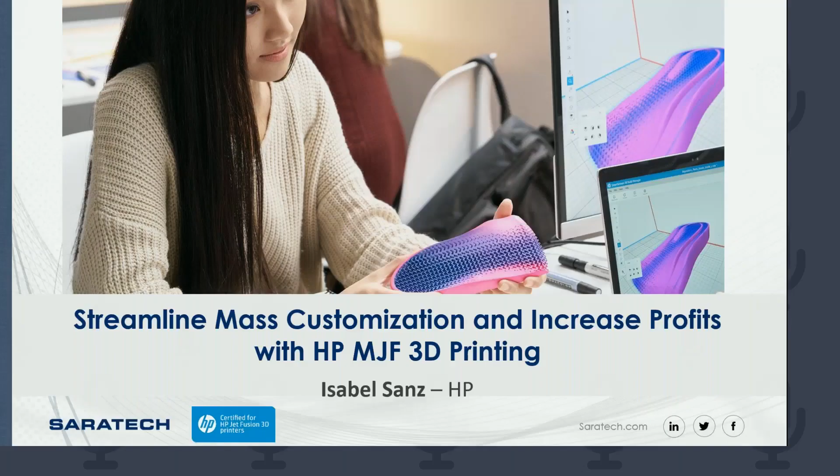So today we have a special guest, Isabel Sanz from HP. She's an inventor. She holds, I think, 10 patents. She's an author, a speaker, and an evangelist for anything that's 3D printing. So she's a very, very busy person, as you can imagine. So thank you very much for being with us today, Isabel.

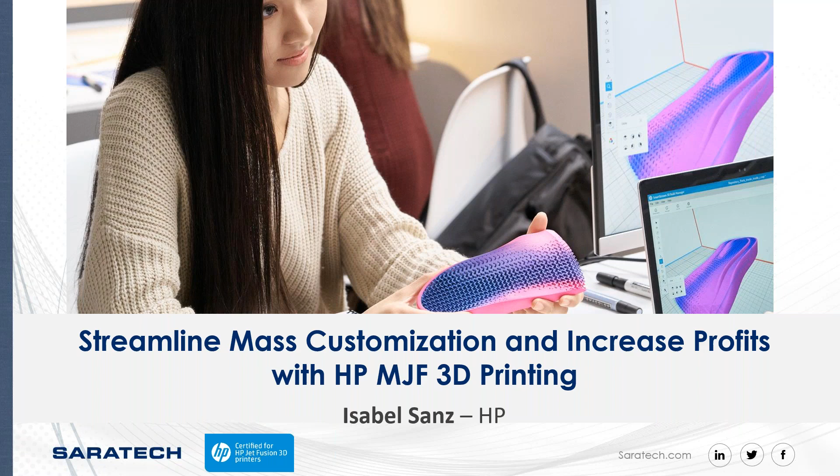Sure. So today our agenda is fairly simple. I'll talk a little bit about Saratech and share with you what we do as a company. But the main portion of the presentation, Isabel will be sharing with us how to customize products efficiently at a lower cost and with minimal waste using HP 3D printing technology.

So if you think about it, mass customization is applicable for many industries. Matter of fact, customers now demand customization a lot of the time for the products that we produce, right? So, whether it's automotive, consumer products, or medical, people want things to be customized. So as you watch some of the examples that will be shown today, think of how they apply to what you do, to your company, and to your industry.

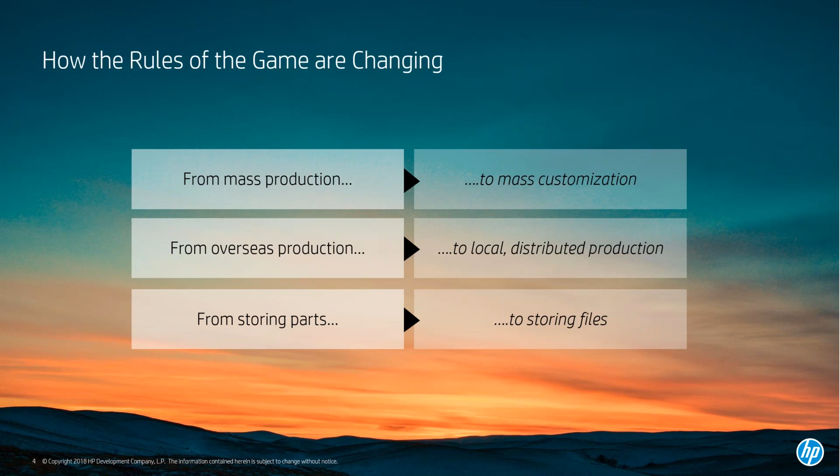Then, on the other hand, from the trend of placing the production overseas, we move to distributed production, which is able to be more flexible to meet shorter lead times and therefore adapt faster to variations in the demand. And even if we take a look into the supply chain, there's a movement from storing parts to producing parts on demand instead. And this will lead to storing files instead of storing parts, which will contribute to the reduction of inventories and warehouses.

And if we run the comparison with other traditional manufacturing methods, we can see some evolution as well in the mindset to design for each of those. When we design for CNC machining, we try to reduce the machining operations. And now, instead of looking into that with additive manufacturing, we'll think about how to minimize the material used. This is the biggest and the main change that happens when we move from a subtractive technology to an additive one.

A cost-effective part in a subtractive technology, such as CNC machining, for example, will be a very solid part, as the cutting operations of the part are reduced in order to minimize the cost of the part. Because if the part is taking longer to be produced, that means a higher cost. But in additive manufacturing, the approach is totally different. A part will be designed in this case to have the minimum material needed in order to be more cost effective. And this also has advantages in terms of CO2 reduction, as it's more sustainable because we have less waste material.

Then in the same direction, if we compare it with injection molding, instead of thinking about the demolding directions in the mold and the draft angles, now in additive manufacturing, we need to consider the printing orientation and design based on that in order to optimize the final part. And finally, if we compare it with sheet metal, we'll move from thinking about which is the folding strategy to make that part work to combine parts together and unify assemblies in order to get the best from the additive manufacturing.

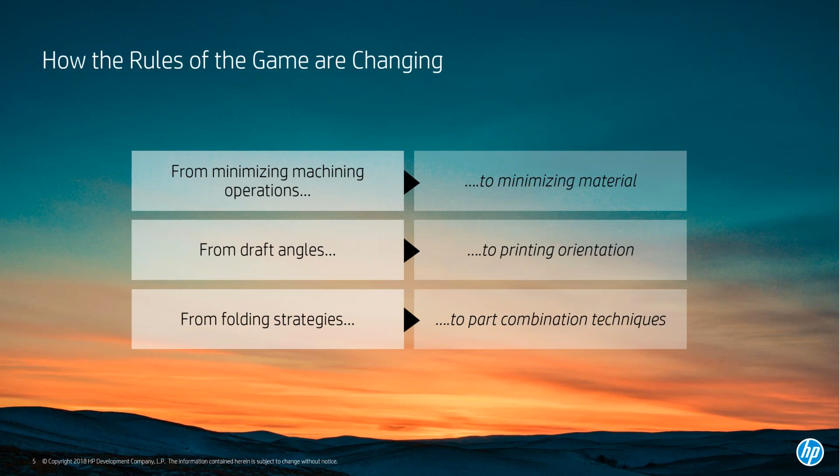And if we look into the opportunity, there are two main ways to justify 3D printing for end user parts, so for final part production. On one side, one of the reasons to move to 3D is to produce parts that are totally personalized or customized, because that's improving the performance, the ergonomics, and is adding additional value to the customer. One clear area where this personalization is improving the satisfaction is the medical industry, because this full personalization of the products is enabling the patients to get products that are designed for them, which are more comfortable and are easier to use.

But this is not the only reason why it makes sense to produce parts or products with multi-jet fusion. There are other cases where the production runs are short or medium size, so the volumes are short or medium, where it makes economic sense to produce the parts with additive manufacturing instead of investing in molds or instead of producing those parts with CNC. The volumes where multi-jet fusion is competitive in terms of economics could go up to the tens of thousands. So it could be 20,000, 30,000 parts per year, and it will depend on the part geometry.

And moreover, in this scenario, there are additional advantages of producing the parts with multi-jet fusion instead of using, for example, injection molding. Apart from the cost, we will generate less waste and we will be more scalable because there is no need to produce the molds in advance before you have total control or you understand completely the demand. So you could scale your production as you are learning from the market how that product is performing. And for example, if we compare it with CNC, we are minimizing the waste because we are using an additive technology instead of a subtractive one.

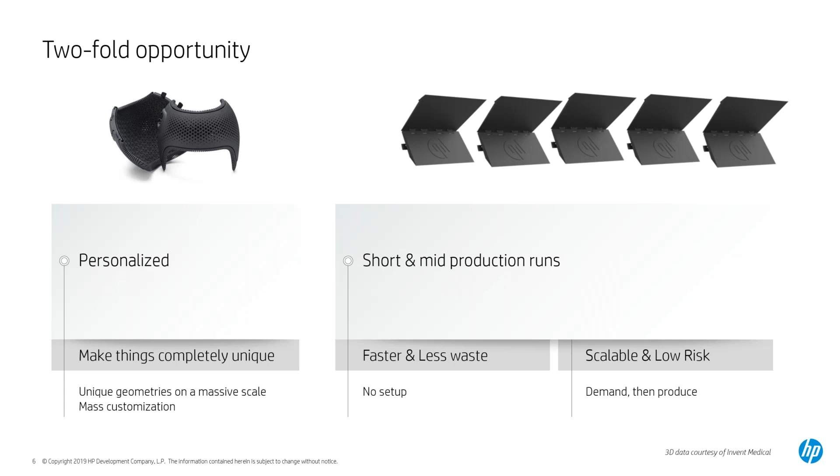Additive manufacturing is a new manufacturing technology and complements the current existing technologies, but it's not the solution for everything. As happens with the other technologies, it can be a very good fit for some types of parts. Therefore, the best applications to start with Multi Jet Fusion are the ones you are seeing in the slide. As I said before, any part with low or medium volume production could be a good candidate.

But if we dive into these candidates, for example, parts where weight is a limitation are a very good fit for the technology, because in this case the mass could be reduced, especially if we are moving parts from CNC machined metal to plastic. In some industries, such as automotive or aerospace, this additional weight is going to reduce the autonomy of an electric vehicle or a drone. So the improvements you can make in weight reduction can bring additional advantages, such as additional autonomy.

On the other hand, in fluid management systems, there are a lot of opportunities to combine parts and optimize the performance of the system itself. Today, the geometries used in these systems are in some cases defined by the limitations of the manufacturing processes used. It's very difficult, for example, to get a tube with a variable diameter. However, this is something we could easily produce with Multi Jet Fusion because there's much higher freedom of design. Apart from that, thanks to HP's technology, we are able to produce parts that are fluid tight, including fluids such as water, air, etc., without the need for any additional post-process.

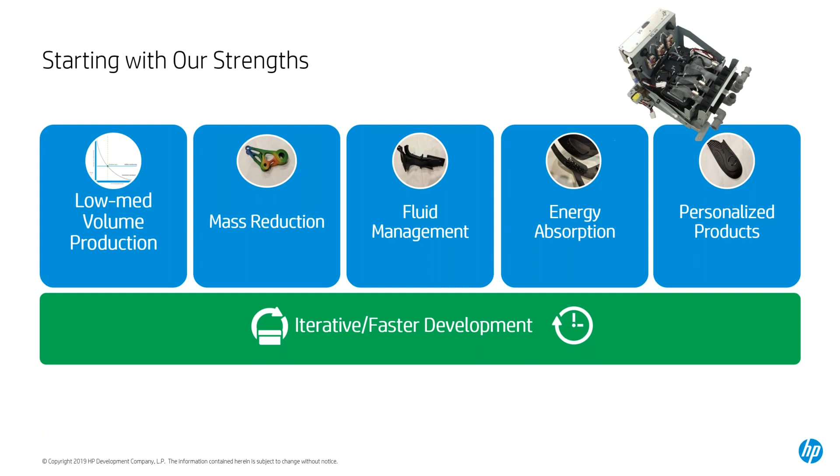Apart from this, in terms of development time and new product introduction in the market, lead times can be reduced with additive manufacturing, which allows more iterations or faster development cycles. Thanks to this, you will be able to introduce products faster in the market, so you can learn faster about the performance and the feedback you are getting from your customers. Having said this, now I'd like to give you an overview of how Multi Jet Fusion is enabling these applications today.

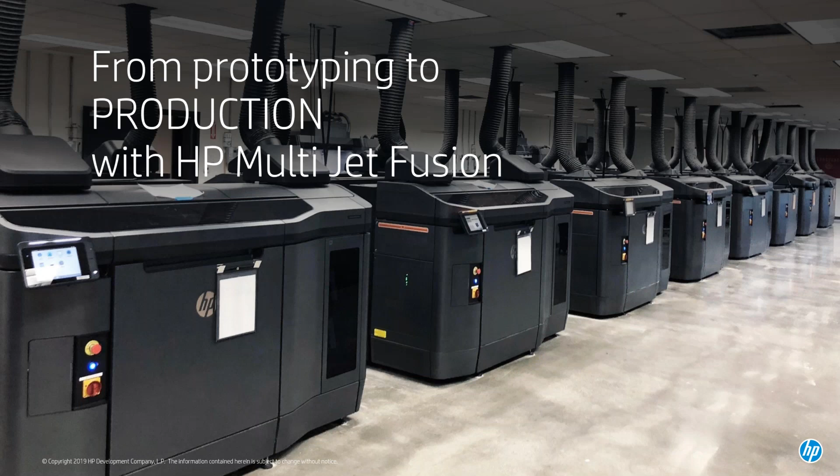Today, we see that there's a momentum in 3D printing, and we are in a strong position. We introduced our first printer almost 3 years ago, and since that moment, we have become the #1 commercial thermoplastic solution. Apart from that, outside researchers have classified Multi Jet Fusion as the most used industrial 3D printer in the market in 2019, nearly 3 times more used than the nearest competitor.

During the sales process at HP, we produce what we call a benchmark, which is an example of the type of application a potential customer is planning to produce. What we see is that more than 50% of those benchmarks today are done for applications that will go into production. So more than 50% of our customers are looking into final part production.

What this is telling us is that new applications have been enabled across all the different industries, including automotive, industrial equipment, healthcare, and consumer goods. As an additional effort, we are also increasing our portfolio. During this year, we have introduced a color printer and we have developed and launched a new metal technology.

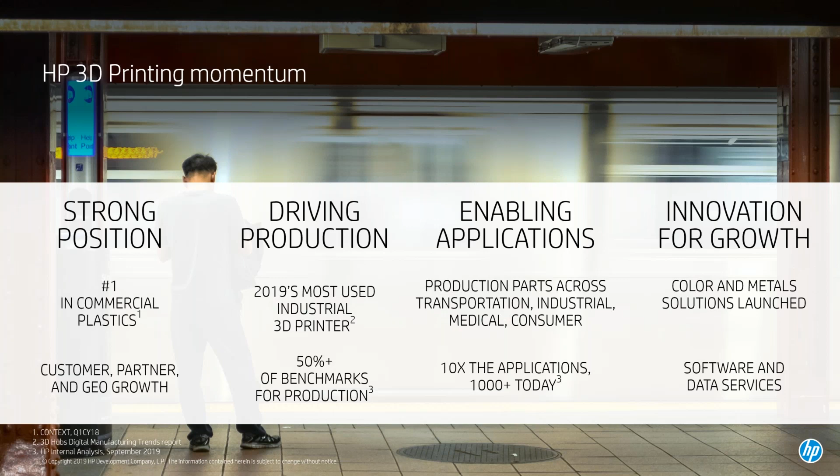But the reason behind all those numbers, and how we made that possible, is the introduction and development of Multi Jet Fusion technology, which is HP's technology. This is powder based, so we are printing using thermoplastic powder particles as the raw material, and the full process can be divided into 4 different steps. In the first one, the HP inkjet printheads apply liquid agents across the print bed, a fusing agent and a detailing agent.

So we have these 2 agents. The fusing agent is the one that defines the area of powder to be fused. The detailing agent, however, is printed on the borders of the part to avoid thermal conductivity to the surrounding powder, which helps to get good part accuracy and sharper edges.

Then after this step, the powder bed is heated by infrared light. In this moment, water and other volatile components from the liquid agents evaporate, and the particles in the areas where the fusing agent has been placed melt and fuse. This happens because the fusing agent provokes more absorption of energy, because it has a higher absorption in a wider range of wavelengths in the infrared region. Thanks to that, the temperature in those areas is higher than in the rest of the print zone.

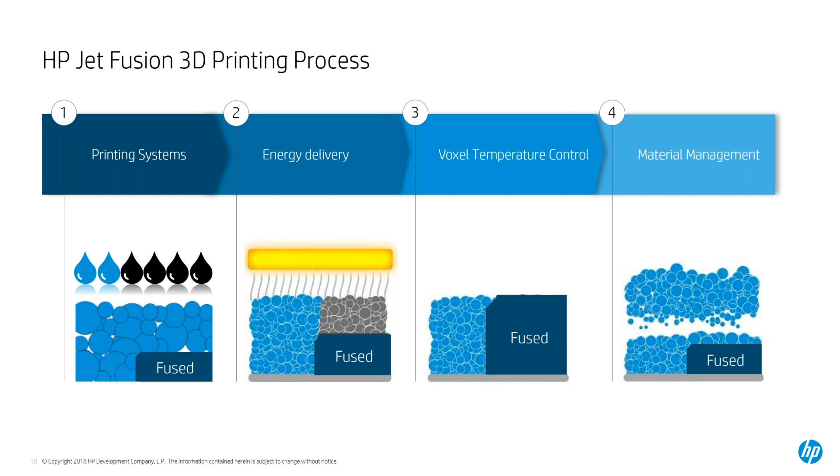This enables fusing the material in those areas where the fusing agent is located, while in the rest of the print zone there's unfused material. Then we repeat this process in each layer. After we have fused the part, we apply the next layer of powder and we continue placing the agents and applying the infrared light afterwards.

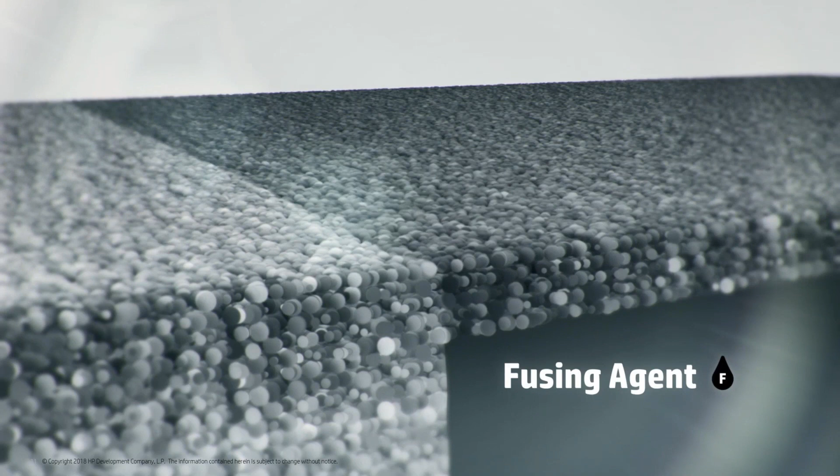Why are we using these two agents? This is done because it increases the thermal selectivity during the printing process. The fusing agent is used to increase the energy absorption of the desired voxels to be made. For example, if we are printing a cube, we will print fusing agent in a solid square in each layer. On the other hand, the detailing agent is used in the borders of the part to prevent heat conductivity from the fused parts to the fresh powder in order to ensure accuracy.

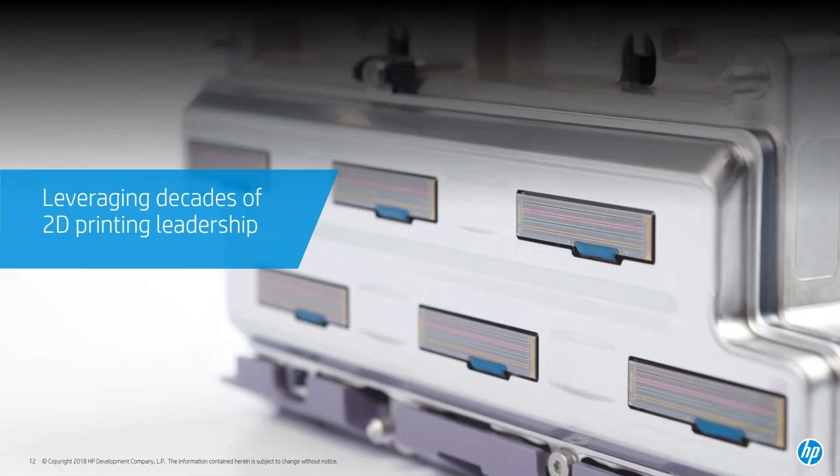As you can see in this video, for every part there will be fusing agent creating the final part and the final geometry, and a thin exterior shell of detailing agent applied in the borders of the part. After explaining the technology, there are also some assets used in this printing process that are key to get this final outcome and performance. One of those critical components is the printhead. HP uses in the 3D printers the inkjet technology that comes from the 2D printers, and that has been developed for years.

Now I'd like to take a minute to talk about some of the characteristics of our printhead. As I said, we have spent dozens of years developing the algorithms for placing the inks where they need to be on a page, and we have transferred this knowledge to the 3D printers. If we take one of our printers, which is the color printer, we can see that inside the printheads we have more than 80,000 nozzles.

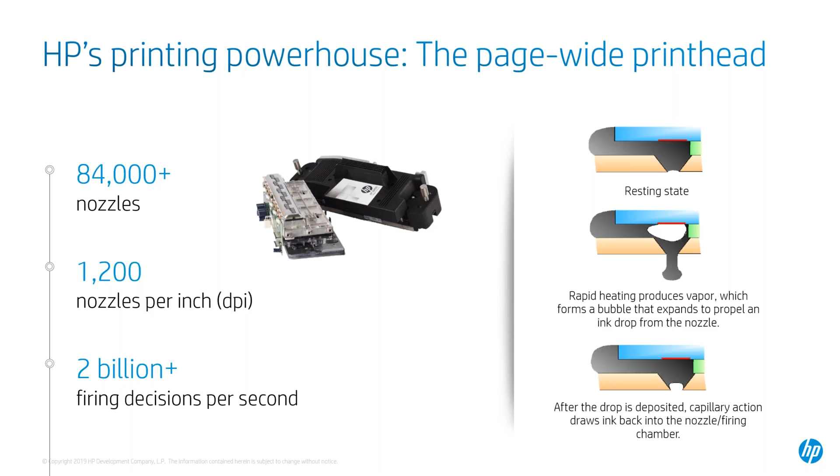The resolution per each printhead is 1200 nozzles per inch. If we combine the quantity of nozzles, the width of the printheads, and the firing speed, we are making more than 2 billion firing decisions per second while a part is being printed. This is thanks to the thermal inkjet technology HP has developed, previously for the 2D printers and now for the 3D space. This is one of the reasons why we are able to achieve this high resolution and high level of detail, because we have a high resolution in the printheads themselves.

Now let's see some examples of customer use cases where Multi Jet Fusion is used today for final part production. As I said before, today we have customers using Multi Jet Fusion in the main industries, which include transportation, industrial equipment, medical, and consumer goods. If we start looking into transportation, lightweight is one of the critical factors, especially in electric vehicles and motorbikes, because it's one of the factors that will determine the autonomy of the batteries.

Then on the other hand, in the industrial equipment, we are able to produce several parts. Two main important areas are the robotic arms and the robotic grips. Here we are able to fully customize each of the grips or the arms based on the final application. Apart from that, we are also able to reduce the weight of the final end effectors.

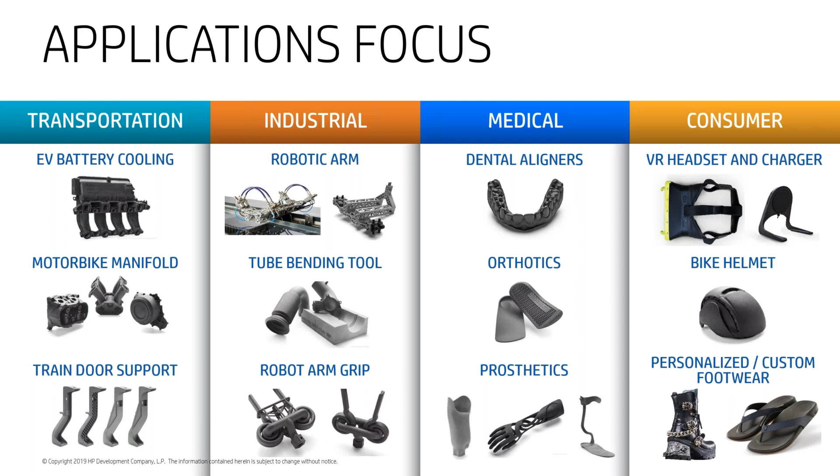And in footwear, there are a lot of options as well in terms of personalization, like the case of these high heels that you see, or improving and customizing the performance of the flip-flops based on the customer that buys them.

And now I'd like to show you an example of a company called Bowman that is using Multi Jet Fusion today to produce their bearings. This is a company based in the UK that has been able to develop new designs of their current existing products and innovate thanks to the use of Multi Jet Fusion technology. Because in this case, due to their volume, it makes economic sense and it's more cost effective.

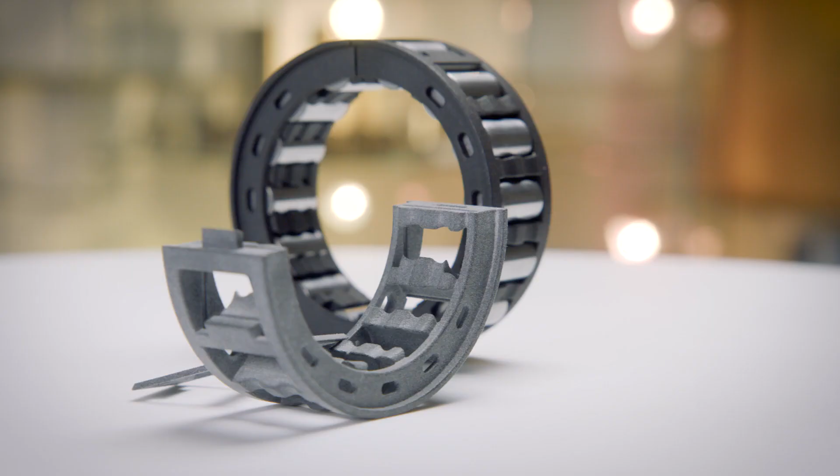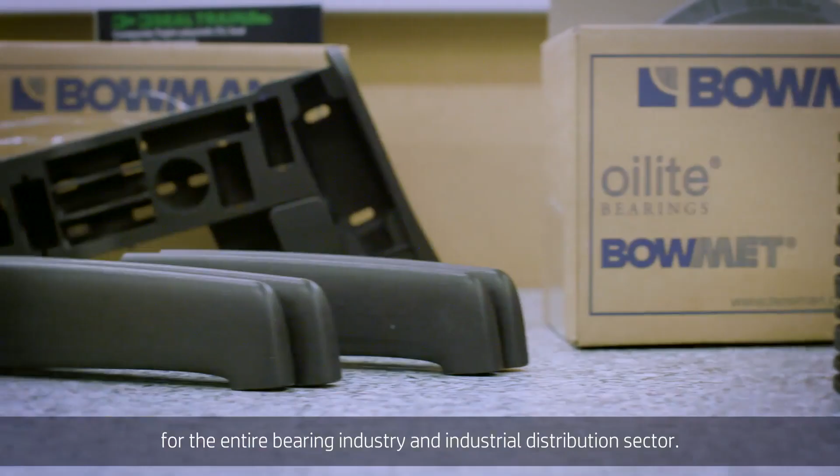What we've been able to do is address designs that haven't really changed for over a century and bring 3D printing in and actually massively improve those designs. Bowman is a bearing company. We distribute and manufacture bearings for the entire bearing industry and industrial distribution sector. We started using 3D printing about 3 years ago when we started developing these products and realizing what could be done with 3D printing.

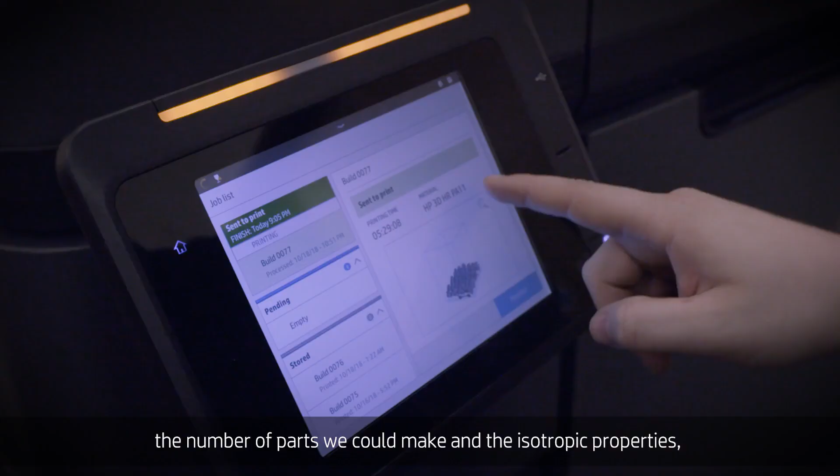For us, the Multi Jet Fusion process was a massive step forward in terms of output, the number of parts we could make, and the isotropic properties, so having the same mechanical properties throughout the part. With designing for MJF, we're able to design for the optimal product rather than being limited in the geometries we can create. So we're actually able to make the perfect bearing cage in our instance.

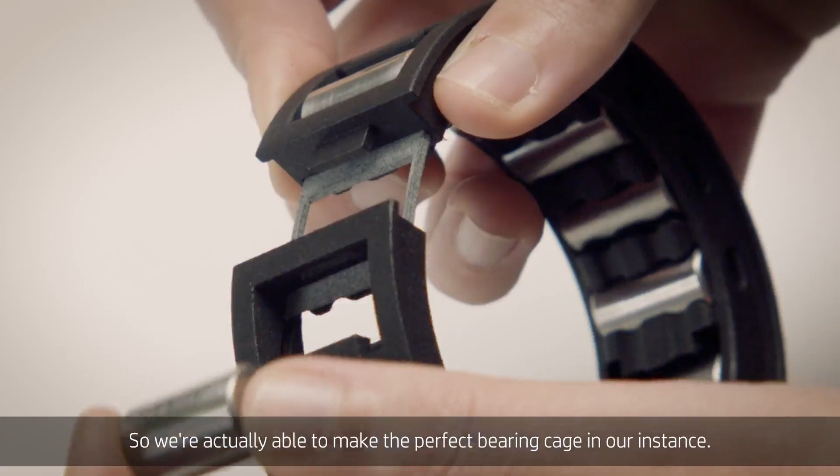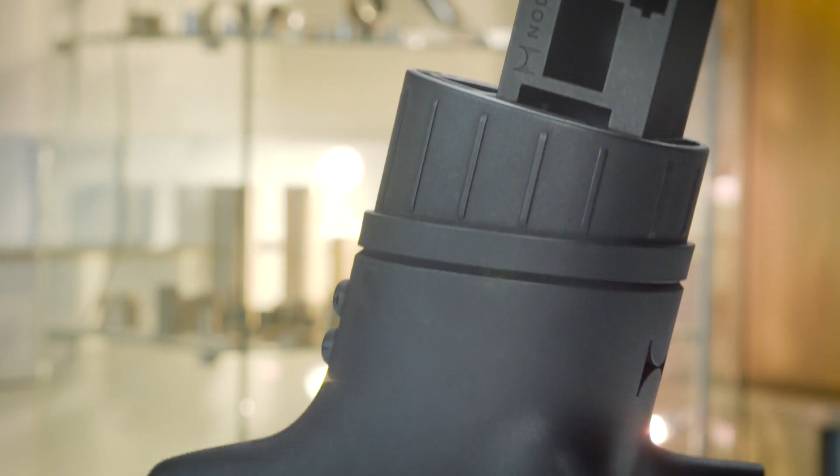For us, PA11 was the obvious choice because it has slightly better mechanical properties, impact resistance, which is important for us, and the elongation at break, and generally just a slightly higher grade engineering material. By using the MJF cage, we're able to take the entire bearing's load capacity 30 or 40 or even 50% higher, 3 to 5 times the life of a traditional bearing. There's not a product on the market that comes close to the performance we can get from our product.

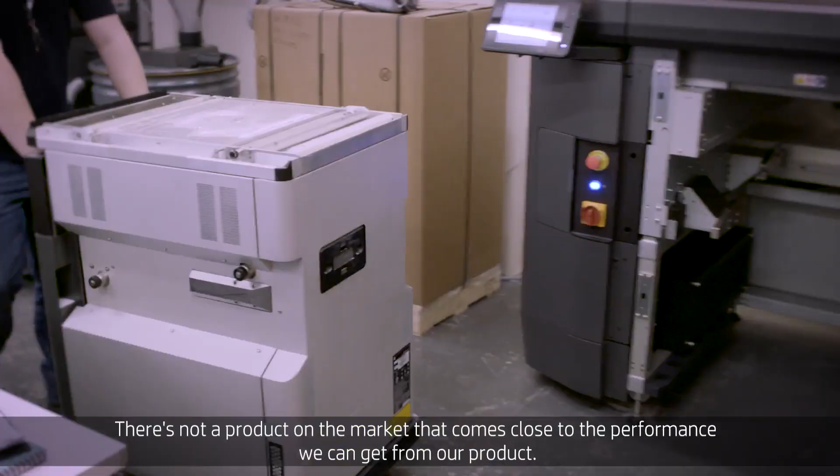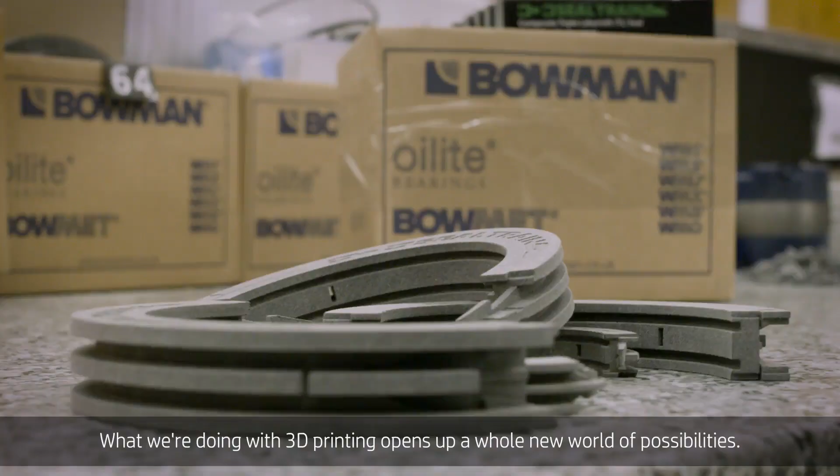For us, having the technical support and backup from the HP service engineers is essential to make sure that we can keep our production system running 24/7. For Bowman, we see an enormous future with using MJF technology. What we're doing with 3D printing opens up a whole new world of possibilities. The bearing industry, just on its own, is an enormous industry with tens of thousands, millions of products every year which could benefit from implementing exactly what we've done already with split roller bearings.

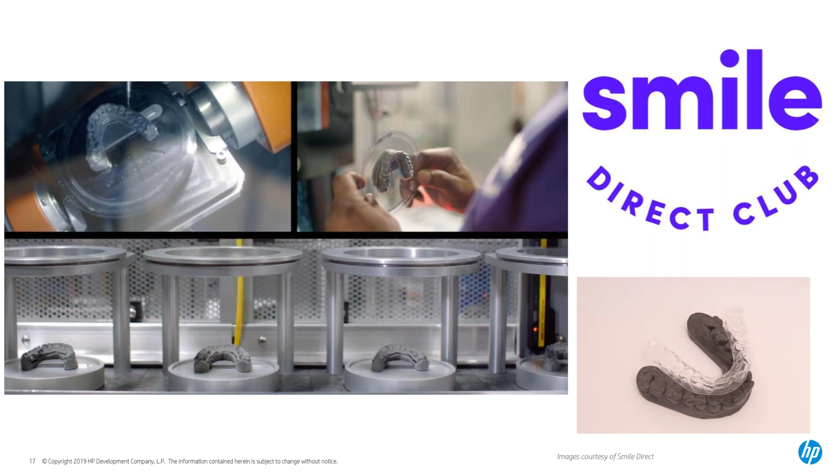Good. So after seeing this video, I wanted to show you as well some examples in the medical industry. Here, there's a new company that is called Smile Direct Club, and this company produces clear aligners for correcting the position of the teeth, and it's similar to, for example, Invisalign, which is one of the most known ones.

This company started as a do-it-yourself aligner treatment for the front 6 top and bottom teeth. And the reason why it's do-it-yourself is because they have reduced some intermediate steps in the workflow or in the process. So now you can go online, fill a questionnaire, and if you are determined to be a suitable case, you can order an impression kit.

So this kit is sent to your home. Then you need to make the impression of your teeth, send it back to them, and then they scan that. And there's a doctor that is going to review those teeth and then propose the different steps that you will follow with the aligners in order to correct your teeth to go into their final position.

So then after that, you can order the set of aligners that you will have at your home in a couple of weeks. And all this process is costing the patients around $1,800, which is a big difference compared to any other aligner treatment that is available in the market today, which have costs higher than $5,000. So they are driving the cost down both in the production of the aligners and at the same time making it easier for patients to access and removing some intermediate steps.

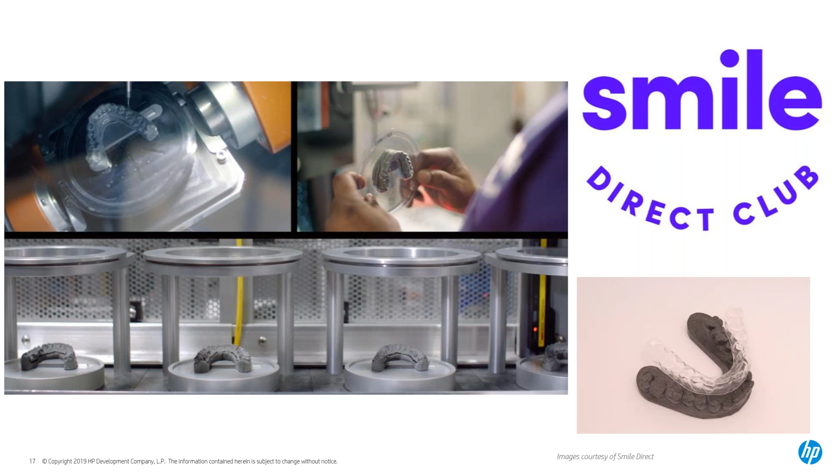And then if we deep dive in the other areas in the medical space, we see that there's a lot of opportunity in prosthetics and orthotics. Here, for example, in terms of productivity, we are able to produce parts faster compared to other traditional methods and compared to other 3D printing technologies. But at the same time, as in most of the cases, the way to produce the final parts today is a very manual process. We are able to reduce a lot of this manual labor time.

Then if we take a look into the quality of the parts, the reason why we are able today to produce insoles in orthotics and in the sports industry is because with HP's technology and with our materials, we are able to produce isotropic properties, which means that the parts are going to have the same behavior no matter the printing orientation. So this is enabling high performance products able to withstand fatigue and a number of cycles, for example, in insoles or any other prosthetics and orthotics product. And apart from this, we have passed the biocompatible certifications to have contact with the skin.

And then if we look into the third pillar, we are also more sustainable than other traditional technologies or processes. So for example, we are able to reduce the waste up to 20 times in insoles production if we compare it with CNC machining. And apart from this, we have highly reusable materials and our PA11 is coming from a renewable source. It's made from castor oil, which makes it a renewable material.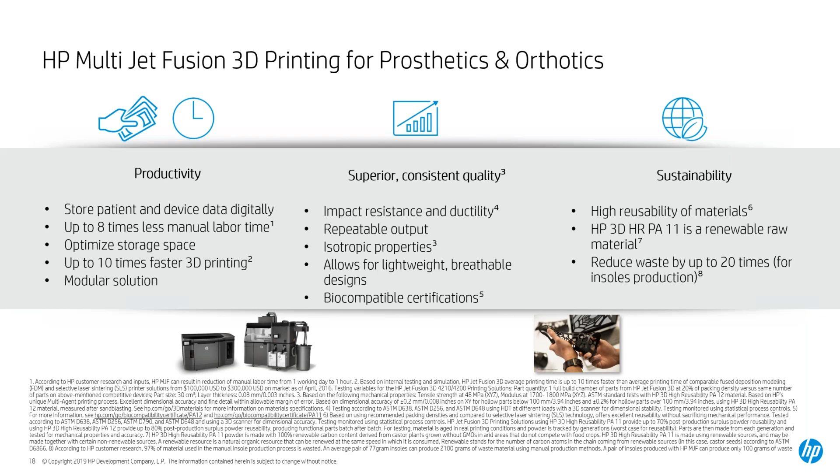And if we look into the potential applications, our best fit in terms of orthotics and prosthetics is in the insoles. In this case, we can modify the stiffness of the insoles based on the customer and the ergonomics, and we can personalize it for each of them. Then apart from that, in braces, DAFOs, and cranial orthoses or helmets, we are able to produce parts that are less bulky and lighter, so they are more comfortable to use.

Then in the sockets, we are able to improve the ergonomics as well. In the sockets this is a big thing, because this has to be in contact with the patient directly, and it has to be comfortable because it's going to withstand a lot of load coming from the weight of the patient. And in the fairings, for example, we are also able to produce parts that are more cost effective and that can be unified from combinations of parts produced in the past with other traditional technologies. But in all these cases, if we take a look into the numbers, we are also very cost effective.

So we are improving the ergonomics, we are improving the performance of the patients, but at the same time, we are providing a manufacturing option that is more cost effective than the traditional options used today, and that it's faster in most of the cases.

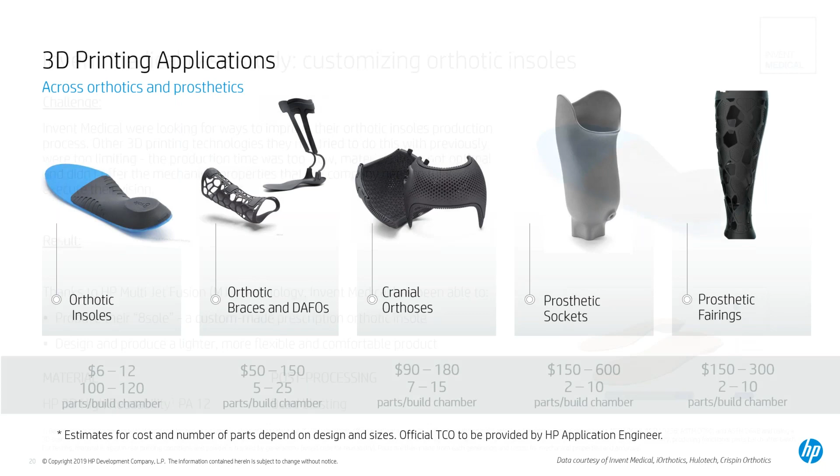And now, if we look into the companies that are using this today, we have, for example, Invent Medical, which is a European company that is producing today orthotic insoles with Multi Jet Fusion with the HP PA12. Here, the main advantage that they have obtained from moving their current process to additive manufacturing is that before they tried other 3D printing technologies, but it didn't work because the technologies they tried were not isotropic and they were not providing the final quality that they required.

So until today, they have not been able to move into production with 3D. And now, thanks to Multi Jet Fusion, they have done this final step. And now I'd like to show you another video where you could see how they make that happen.

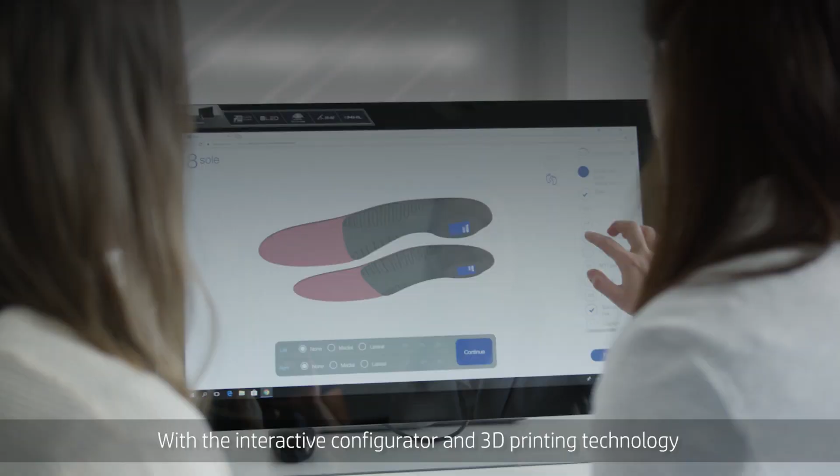I started working out with a personal coach and I started noticing some pain in my feet. With an interactive configurator and 3D printing technology, I am able to design truly custom, perfectly fitting orthotic insoles. With Multi Jet Fusion technology, we are able to design and print out directly the final product to make the product lighter, more comfortable, flexible, and to increase its performance.

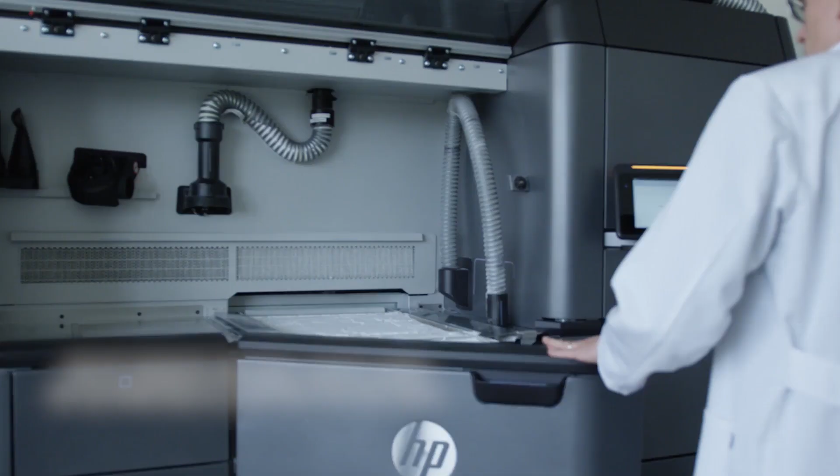After I got my first insoles, I was really surprised because I was able to run almost for an hour without noticing any pain. I can fit them into any of my shoes and don't even notice them. We believe that with 3D printing by HP, we can disrupt the whole industry by providing patients all around the globe with new advanced products that can improve their lives.

Good. And after this video, I'd like to show you my last example of a final part production today. And this is the case of Hulotech, which is a company that is producing parts for additive manufacturing, and it's also an engineering company that is specialized in the production of some medical applications. And in this case, one of the things they have started to produce with our technology are the sockets.

So in the sockets today, the problem that they have is that with the traditional process, which is normally producing these parts with plasters, they end up having products that are very heavy. They have a poor durability, and the most important thing is that they are not comfortable for the patients. And apart from that, when one of these sockets is produced and it's tried by the patient, they need to do some final adjustments in most of the cases in order to make it totally fit. So now they have moved into Multi Jet, and they have been able to overcome all these problems they had in the past.

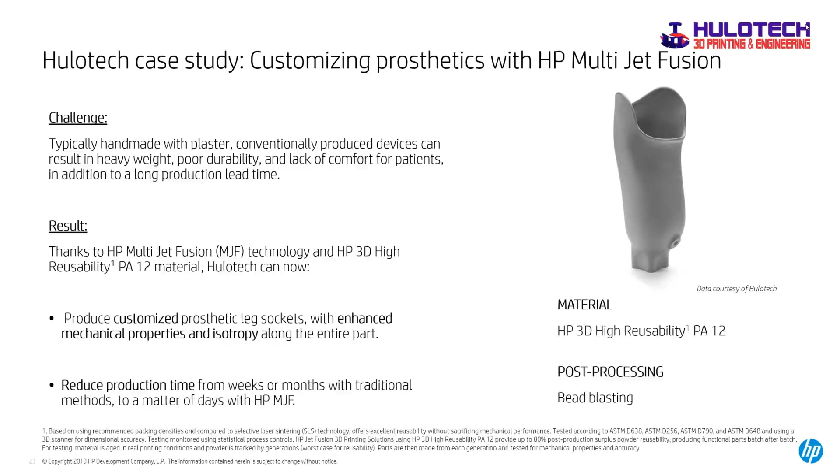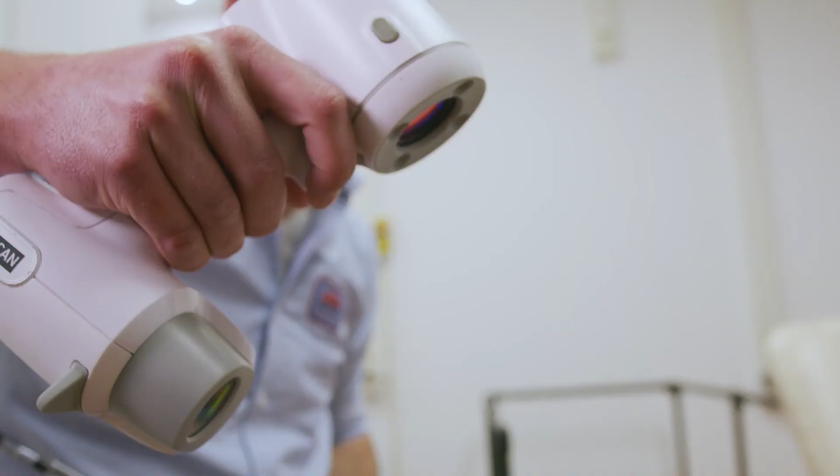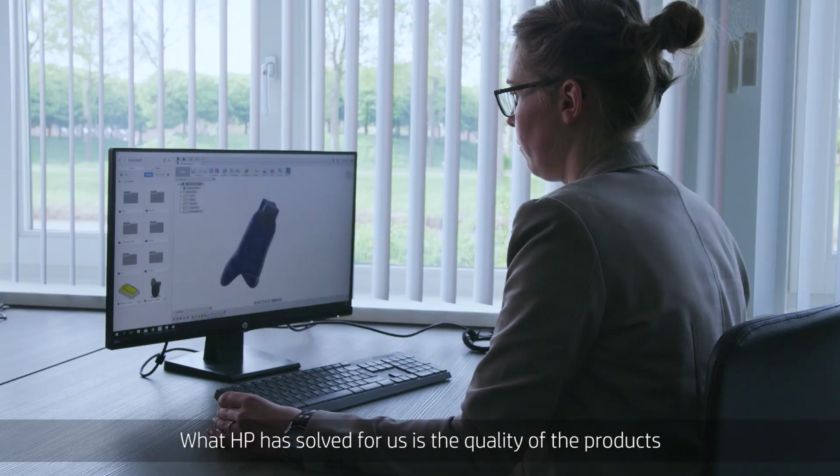I had an amputation when I was 1 year old, and since then I've had so many prosthetic legs. My patient lost his leg in a traumatic accident, and he came with a wish to walk again. So we make a socket as an interface for his prosthetic foot. What HP has solved for us is the quality of the products. Unlike previous experiences I had, where I had to fit the socket a couple of times, which could take sometimes weeks, in some cases months, to get the final fit, this one was a perfect fit the first time.

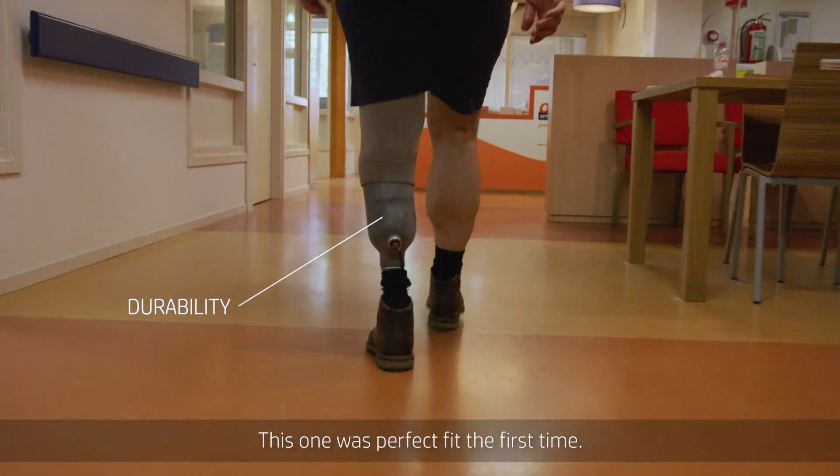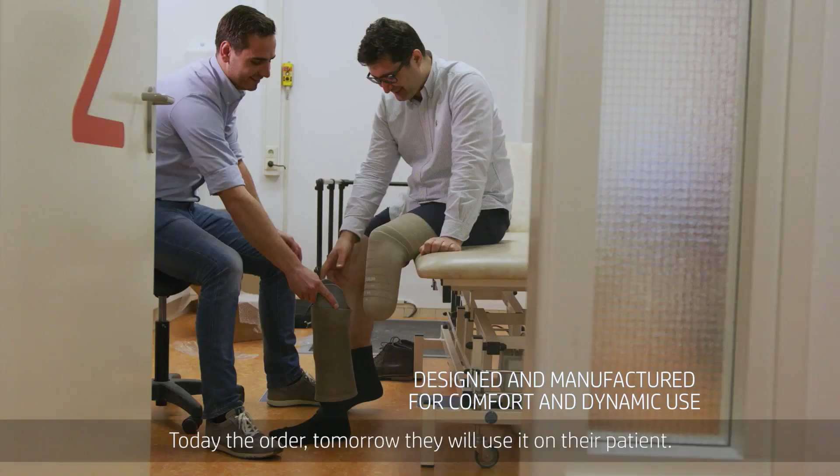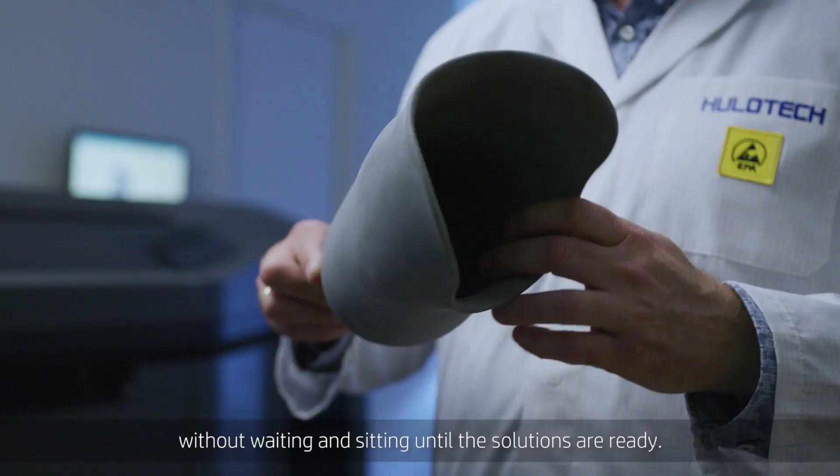The main reason Hulotech invested in this new MJF technology was the fast production time of parts. Today the order, tomorrow they will use it on their patient. I believe that this technology is a good step towards a future when we as patients can get the results very quick and see that we can comfortably go back to life without waiting and sitting until the solutions are ready.